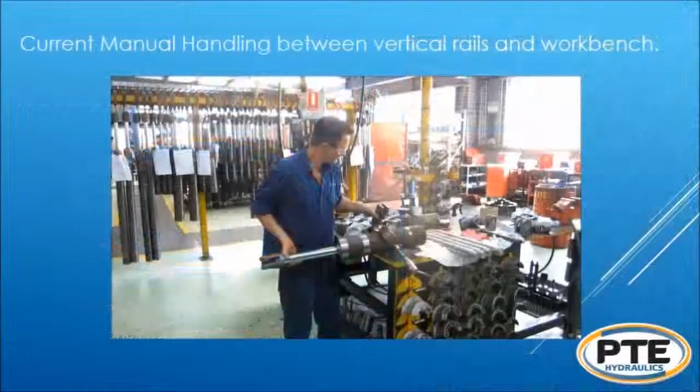This project is being undertaken at the request of PTE Hydraulics to improve the operator safety of the assembly and packing workshop in their Brisbane premises. Currently, operators in the plant are physically lifting and manoeuvring the hydraulic cylinders, weighing up to 100 kilograms, to and from their workbenches. A lifting system that removes the weight strain from the operator is required, including gripping, lifting, and

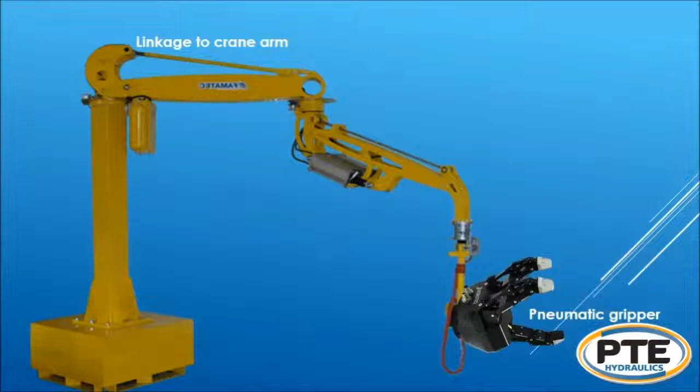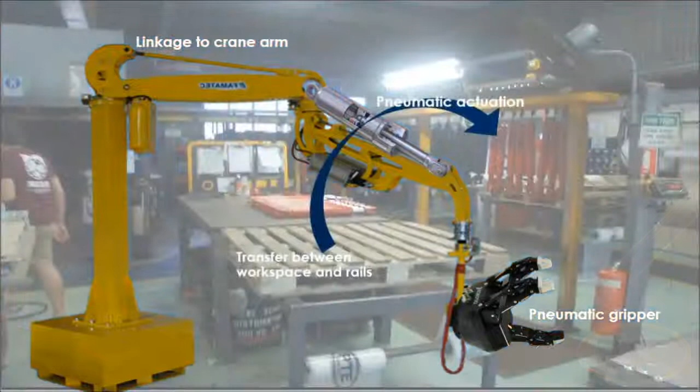manoeuvring capability. The project has been split into 4 components. A gripping mechanism will be required to attach onto and hold the weight of the cylinder. The linkage between the gripper and the jib crane must be designed and be vertically adjustable. A pneumatic actuation system must be designed to power the gripper and the lift. And finally, the system needs the capability of rotating the cylinders between their vertical mounting and the horizontal workspace.

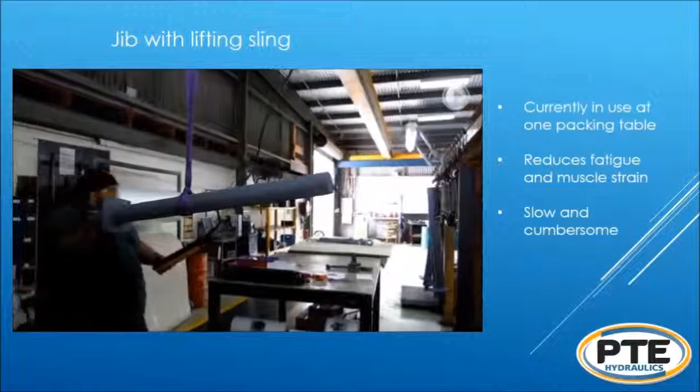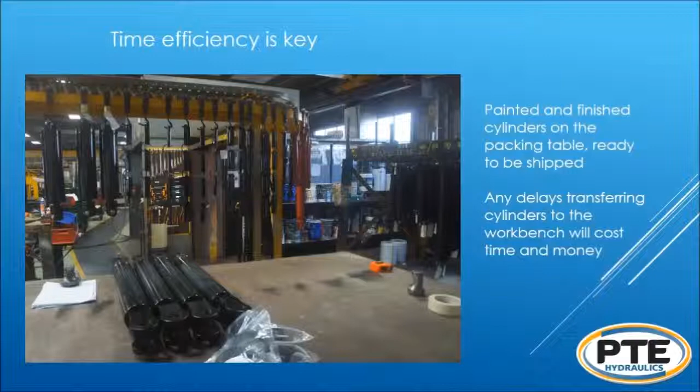The goal of this project is to prevent injuries to the operators caused by repetitive lifting and manual handling of the heavy cylinders. There is a single jib crane available, however the lifting sling is slow and cumbersome to use. The project also aims to match or improve the time efficiency of the current process, to reduce cycle time and prevent operators from reverting to manual handling. This time efficiency will determine the success of the project.

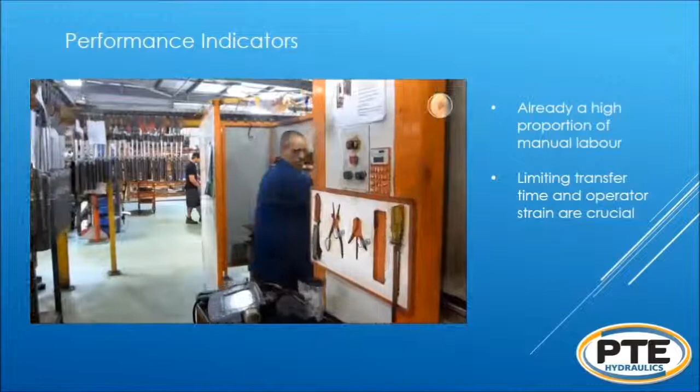Safety and function are the 2 major concerns. If the prototype system works to specification, then there will be no danger to the operator. However, if the use of this system slows the operator's job, then they may revert to manual lifting, endangering themselves and marking the project a failure.

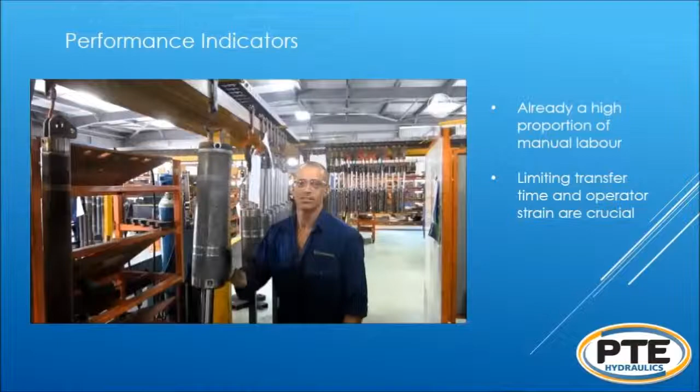Hi, my name is Mitchell. My role as a technical officer focuses heavily on the design of the hydraulic cylinder gripping mechanism. Due to the large variety of hydraulic cylinders PTE produces, the gripping mechanism must be very versatile. I will be responsible for ensuring the design of the gripping mechanism is fit for purpose and user-friendly. The gripping mechanism will be designed to suit as many different hydraulic cylinders as possible.

An effective design of the cylinder gripping mechanism is critical for a successful overall solution for PTE. As the technical officer, I will be working closely with the other team members in the design phase. This will ensure the whole design is cohesive and collectively meets the design scope and requirements.

Hi, I'm Blake. I'm the liaison between my team and PTE Hydraulics. For our design task, I will be focusing on the section between the jib crane and grabber mechanism. The Oxford Dictionary defines liaison as the communication or cooperation which facilitates a close working relationship between people or organisations. Our team wants to create a healthy and versatile relationship with PTE Hydraulics. It is my role as a team liaison to build this.

I am in charge of providing a monthly progress report for PTE to view and provide feedback on. This will allow us to get consistent feedback on a regular basis. We're all about providing the best solution to them and something that they'll really want to use.

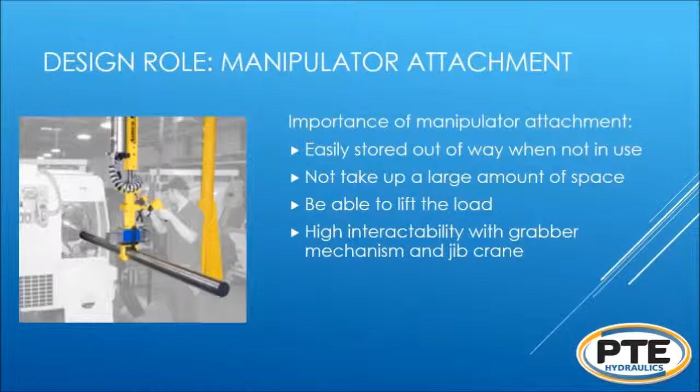The manipulator attachment that is to be designed needs to be easily stored out of the way when not in use, not take up a large amount of space, and be able to lift the load. During the design phase, it is important to ensure that it can be attached onto the jib crane and also the grabber mechanism. This involves a large amount of adaptability and working with all my teammates to ensure full functionality of the designed lift assist.

Hello, my name is Brodie and I'm the team leader for this project. My main task is to design the power actuation system, as each of the other 3 aspects will require some form of powered device to provide movement. There are multiple ways to provide power to the system, such as electrical, hydraulic, and pneumatic. Research has indicated that pneumatic is the preferable method, and my focus will be on designing a pneumatic system for our mechanism.

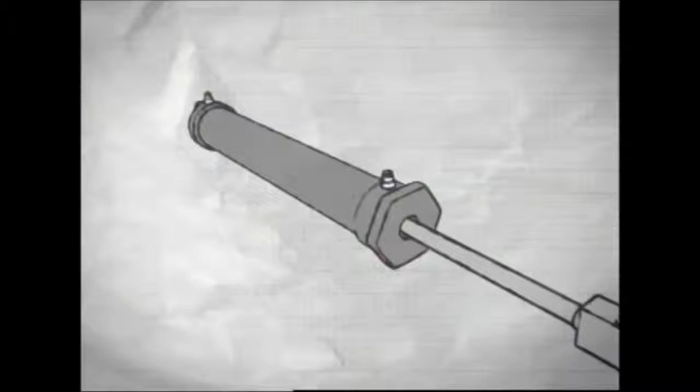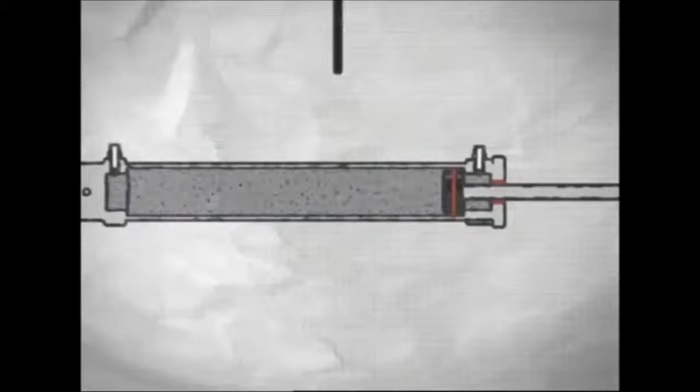To successfully integrate the power system with the mechanism's functionalities will require close cooperation with the rest of the team. This will ensure that I can provide a system to actuate all parts and provide the right amount of gripping force and user adjustability. To achieve end-user functionality, I will also be reliant on prototyping to fine-tune the design.

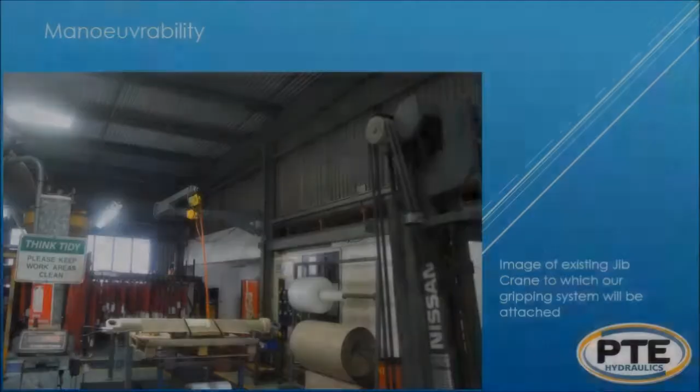Hi, my name is Anthony and I'm the team manager. My role is to design the manoeuvrability system to allow rotation between the vertically mounted cylinders and the horizontal workspace. Manoeuvrability is a major concern for this project, as the transfer of hydraulic cylinders is the weakest element of the current process. A number of possibilities were considered, including winches, levers, and powered actuators.

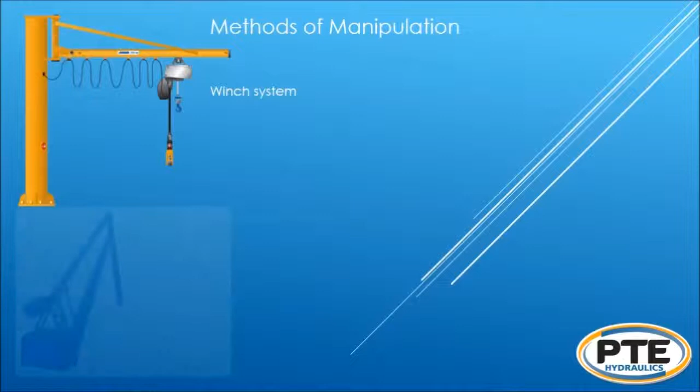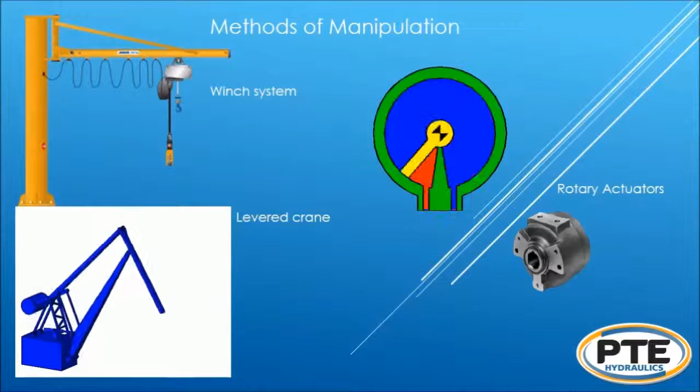A great deal of collaboration with other group members is required, as this aspect of the design is incorporated into each other component. The research into the attachment segment concluded that a rigid articulated arm would be best to support the mass while providing control. Industrial manipulators are a prime example of this design, and are commonly used in industry.

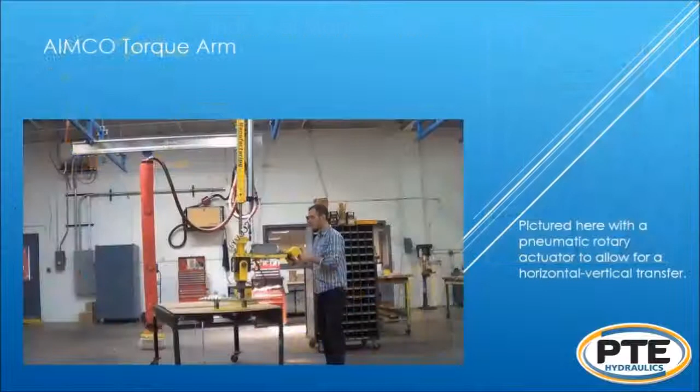The Aimco torque arm shown on screen is fitted with a gripper on a rotary actuator, with essentially the same function we wish to create. It is likely we will use a pneumatically powered rotary actuator for the transfer, as it prevents the weight being balanced by the operator.

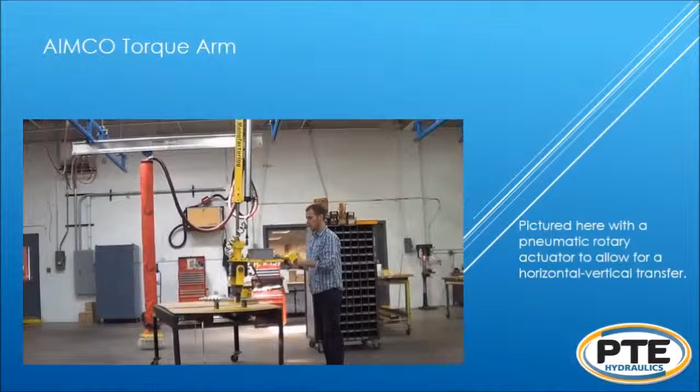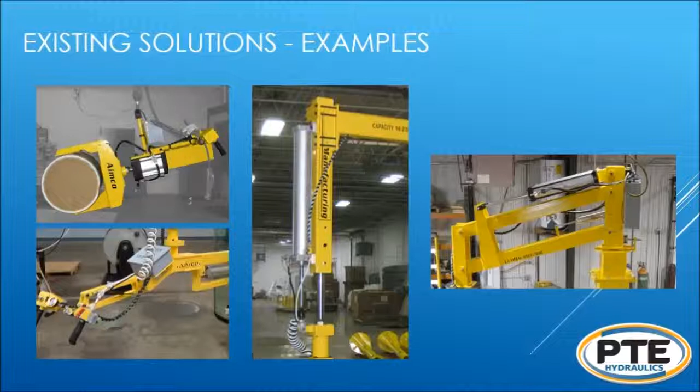Existing industry solutions to manual handling problems have been investigated to gather knowledge on proven methodologies and designs. The direction of this research has closely followed each team member's specific role and their respective aspect of the physical design. The following diagrams show some of the possible solutions for each aspect. The use of mechanical jaws or a lifting magnet is being investigated for the gripping mechanism. Pneumatics will likely control all powered features.

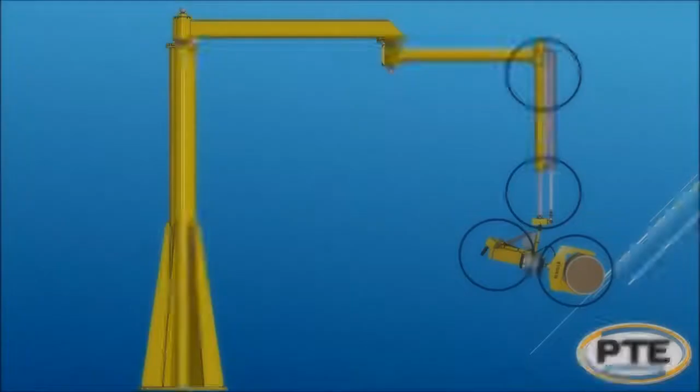Over the course of the year, we will be providing a monthly update to our supervisor at PTE to ensure that the project is meeting client requirements. During the CDR phase, additional consultation with PTE will be sought as a final design is produced. Each member will continue to work on their individual aspects, whilst also assisting each other with integration.

Once approved by PTE, prototyping will commence prior to the final project report due date, so that we are able to test and redesign for any issues should they emerge. It is our intention to have a full-sized working prototype and production plans for presentation to PTE by the end of the year. In terms of work breakdown, each member will continue working on their designated aspect, whilst also assisting the team with the other aspects and assessment items.

In summary, individually we have discussed our parts of the project design and our role in the team. We have clearly defined our project and scope, shown some examples from our preliminary design reports, and created a project timeline. By the start of August, we should be moving from consulting and finalizing our preliminary design to prototyping and testing in the PTE manufacturing facility. This will carry out through to the end of October, where we will hand over the project for PTE to implement the designed lift assist.